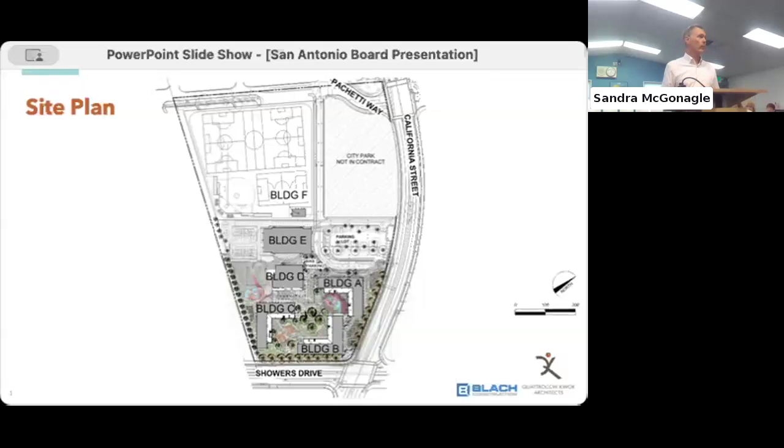Thanks, Nick. Zooming in a bit on the site plan, there's the parking lot, there's the gym. One of the things we're always trying to do with outdoor spaces on elementary school campuses is balance a bunch of different needs. We want spaces for outdoor learning, for student gathering, for quiet contemplative space, but also very active spaces for play structures and games, and do that in a way that's easily supervised.

So the way we've used these three L-shaped buildings is to create a few intersecting spaces that are a little more private, and then that connect out to the more public space. We also have the additional complexity of the joint use piece and all of these things coming together.

With the three buildings, A, B, and C, across the first floor we've spread the little kid classrooms—TK, kinder, first and second grade—as well as the admin and the library, and some support classrooms. So we have a TK kinder play area as one of those first courtyards, right near the admin, right near the entry. Parents often drop their kids off directly into that playground, so we want that to be easy to access, and easy to corral the children at that age. That's the most protected courtyard there.

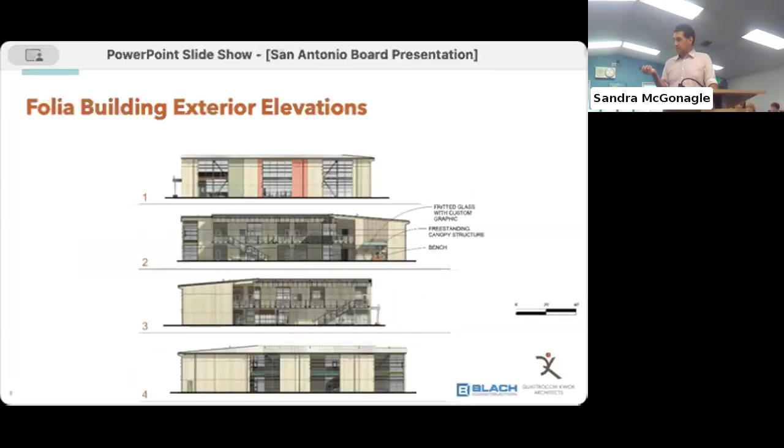And then here's a rendering, we'll show a few renderings. These are pretty schematic, as is the nature of where we're at, early on in the process, so there's still a little bit of a sketchy vibe to them. But just to give you an idea of what these spaces will start to feel like.

So this is looking at the side of building A. This is the main entry, with the parking lot beyond. This is an initial idea of what that canopy might look like. And then there's the main lobby, and we've added some extra glass on that side looking out, so there's really good supervision of that point of entry into the campus, and it's also a welcoming and inviting entry for parents.

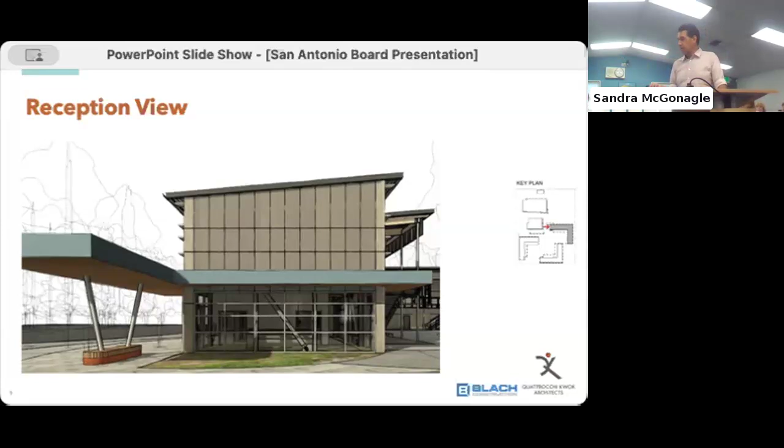There's another view looking down that avenue that leads out to the playground, back into that area. So you see a hint, just a suggestion there, of a playground. We haven't gotten to choosing playground equipment and things like that yet, but that would be where that TK kinder playground is. You can see the second floor walkway going around to the building, and then there's that main entry too. And then this is the covered outdoor eating area that extends off of the MPR.

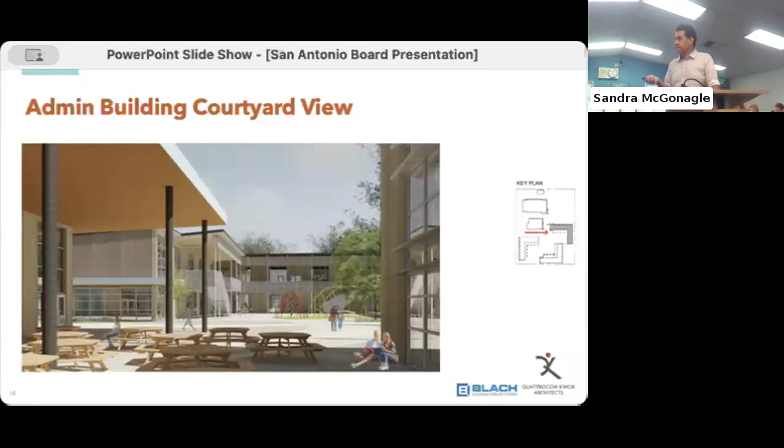On building B, making our way around the corner, on the first floor here are 2 kindergarten classrooms, still pretty close to where that playground is right here.

And then there's a flex space between that, which can be a great space for like an RSP or other special education support staff, or it could be configured for offices, any number of things as well. You see there's custodial and some storage space there as well, and then the restroom for the kindergarten classroom. And then the same thing over here, so we have a restroom here tucked behind the elevator.

And then we have our grade 1 classrooms, very similar to what we saw on the second floor of the other building, where there is a double classroom with an operable partition between it, and your storage and tech wall and displays within that.

And then we have one of those flex classrooms. You suggested this might be a good spot for like a makerspace kind of classroom. It's pretty centrally located on the campus, and it can be accessed by all the students because it's on the ground floor. But the exact uses and what we need in each of those spaces are one of the things that we'll dial in as we go forward.

Second floor of this building is another flex classroom here. And then here we have the grade 5 and 6 classrooms, and then another one of those unassigned flex classrooms here to give extra flexibility.

You'll see some of these are called breakout spaces, which are small conference room spaces connected to both classrooms, providing a spot to do pull-out instruction while still being supervised by the teachers in those classrooms.

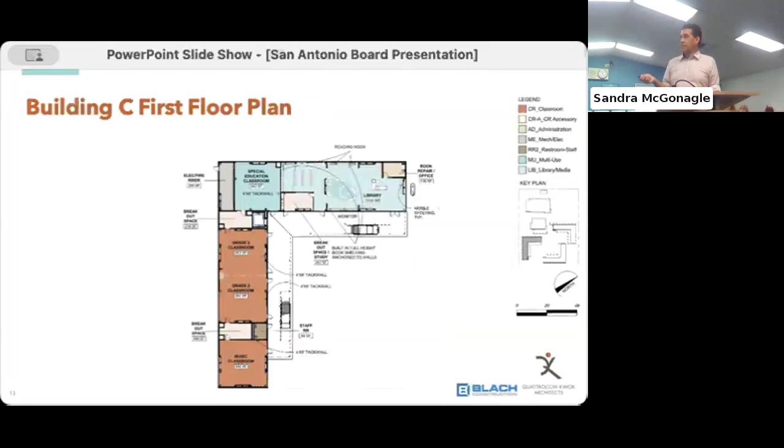If we're bringing a whole class or even two classes in to do a presentation, sometimes you may even want to use these two parts separately. This is an initial pass we'll dial in further. There's a little office book repair room, and a larger breakout space for larger groups—could be student groups meeting to work on a project, or a staff member working with a small group of students.

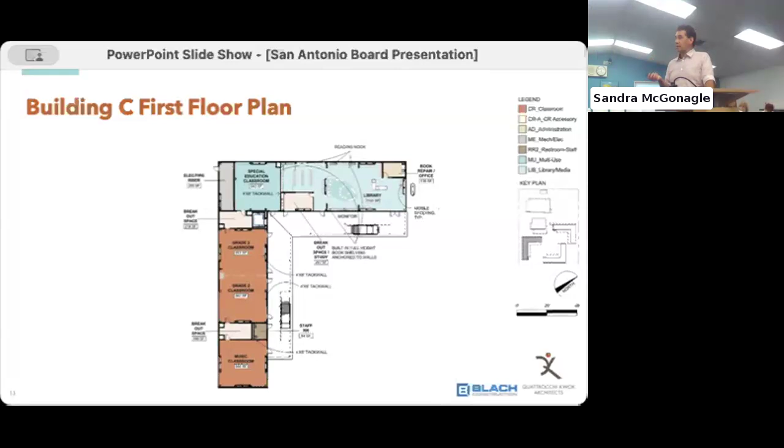Then we have the second grade classrooms, and another one of those flex classrooms—in this case we're suggesting maybe a music classroom on the end. Going up to the second floor of building C, we have the grade 7 and 8 classrooms, and here we're suggesting a science classroom as one of those flex classrooms to support especially the middle school grades, plus one more unassigned classroom below.

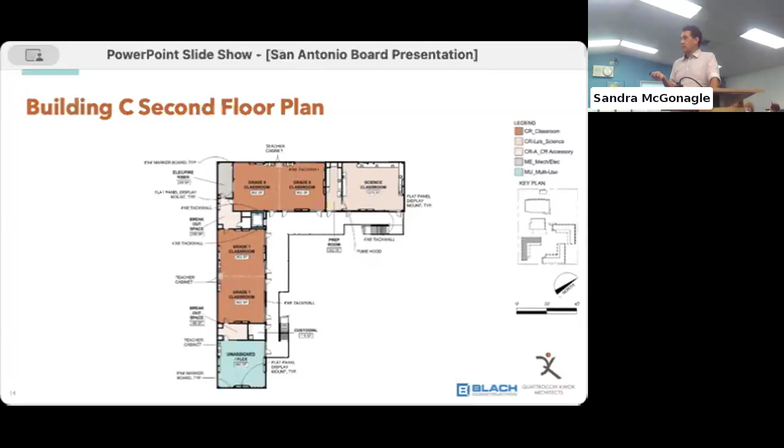Here's a quick courtyard view, looking back across to building A—this is between buildings B and C, you can see the arrow there. Looking across that courtyard, you can get a sense of the interconnected spaces, looking back towards the entry, the TK Kinder playground, and the balconies where the bigger kids are, overlooking those spaces as well.

Thanks. Forgot to mention, you guys can interrupt us anytime. Oh yeah, trying to get some. Yes, sir.

Is there a question about restrooms on the second floor—staff or students? I think we're still working through some of the restroom placement. There's been more discussion about it. There seem to be a lot of staff restrooms there. Yeah, I think we've had different discussions about where and how the student restrooms might want to be distributed.

That connects to something we've been discussing too—should we have bridges between all these buildings so you could move between the second floors of all of them or not? That obviously adds a little extra cost, which we'll talk about later, but it gives more flexibility as far as circulation and accessibility of the students to those restrooms.

So now I'm going to talk about the custom buildings—not Folia's, but the specific site-built buildings. This first building is built on the floor plan for the multi-use building. As Aaron mentioned, it's on the site right here, and this avenue here is the outdoor eating area, shown in the dashed line. In the renderings there's quite a nice overhang providing shaded outdoor area directly off the assembly room of the MPR, connected with double doors and even a couple roll-up doors, so it could really be an integrated indoor-outdoor space.

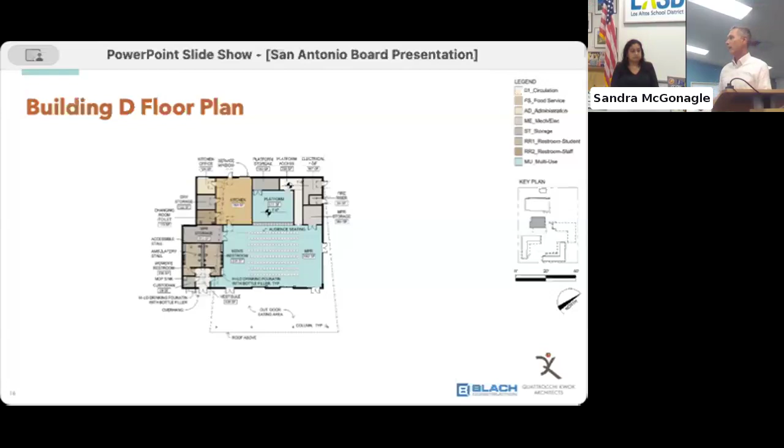Moving forward, these are the exterior elevations of the building. So the first thing I want to point out, and you can see it in the side elevations, this is all outdoor space. This vertical line here is a column capturing the long overhanging roof, and you see it again down here. So this is the outdoor eating area.

You can imagine tables here. And these 2 elevations, the north elevation and the south elevation, you can really see the shadow, hopefully illustrating the kind of shaded area that we would create for you.

Actually, this is the back of it, so these are the roll-up doors, and these are the 2 entry doors that would face where all the tables are. These are the doors into the restrooms that we talked about earlier. This is the back or the north face facing the gymnasium, so this will be the serving window for now and entry to the kitchen.

And then the same sort of materiality that Aaron talked about, using softer tones for the plaster and perhaps highlighting it with some colored metal panel or cement plaster. Again, trying to keep it somewhat neutral until we know more about what your goals are. Maybe you really want a bright, colorful campus, but we'll find out about that as we move forward. We want to provide opportunities for both highlights as well as nice neutral zones.

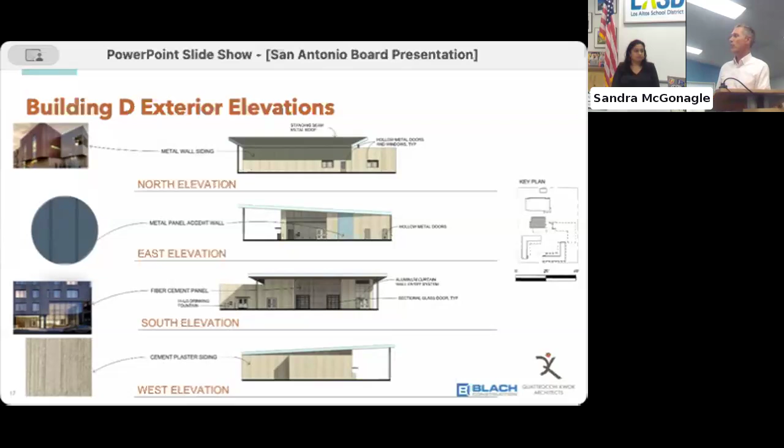This is a view looking kind of from the kindergarten area toward the dining area. This is the 7th and 8th grade building wing up here, and this is the library right here. And then we're looking over here - this is the outdoor eating area, the public entrance to the building right here, and 2 entrances into the multi-use from there with the roll doors, which are kind of hidden in the dark.

Oh, sorry. Is that your... that's fine. Sorry about that, folks. Okay.

Moving on to the gymnasium. This is something you've all seen before for the most part. What we've got here is the gym proper, designed for middle school right now, with the striping and the size of the striping and things of that nature.

We've got the primary lobby here at this lower corner off the parking lot, leading you to an office for the city recreation department, and then toilet rooms, a janitor's closet, a little bit of storage. Then we get into the entry to the gym with the bleachers along the bottom, nice direct access for visitors. There'll be some storage for the city up here, some building infrastructure right there.

Over here in this wing, the locker room wing, we also have storage for the school, so everybody has their own storage. Boys and girls locker room complete with locker room and toilet rooms, and access to the outside as well as access to the gyms. In addition to that is the field house. There will be restrooms designed as part of the field house, along with storage and maintenance.

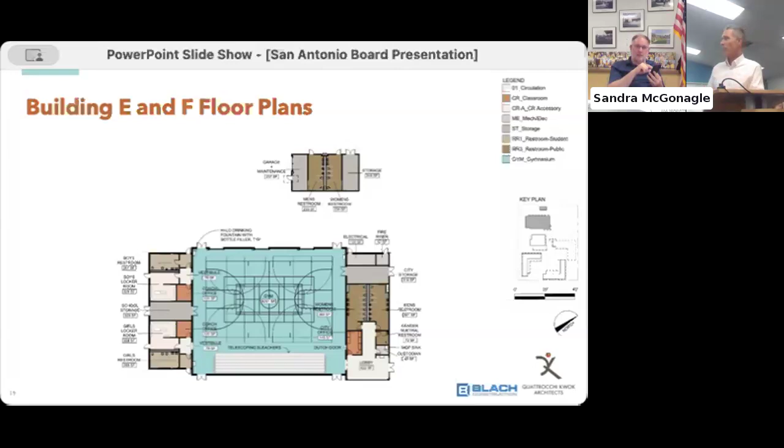Can I ask a question? Where did that field house come from? I don't remember a field house. That was part of the program from the beginning, for fields. We may not have talked about it in great detail, but it's been there from the beginning. So it's called a field house, it's a restroom building to serve the field. Let's clarify, field house makes it sound a little grander than. Right, I understand, I just don't remember it.

I have a follow-up question. This is an agenda item we haven't gotten to yet, but I wanted to review what was in the joint use agreement. What I see is that it will include athletic fields, including soccer and baseball field, and a few other optional add-ons, but I didn't see anything about a field house, so I didn't know if that was part of the joint use agreement. When we finalize a joint use agreement, we can talk with the city about whether they're gonna pay for that extra building or not, is it something we would have at our schools. We might not have a bathroom out in the field, we do have porta potties at all of our schools, but I know PE does like having storage out there. All of our schools have little shacks and sheds, little tough sheds out there for storage. But when we get into the final joint use agreement with the city on any additional costs, we would work with the city to see if they would want to partner and pay for some of that cost.

Do you know roughly how big the field house is? Good question: 1,100 square feet.

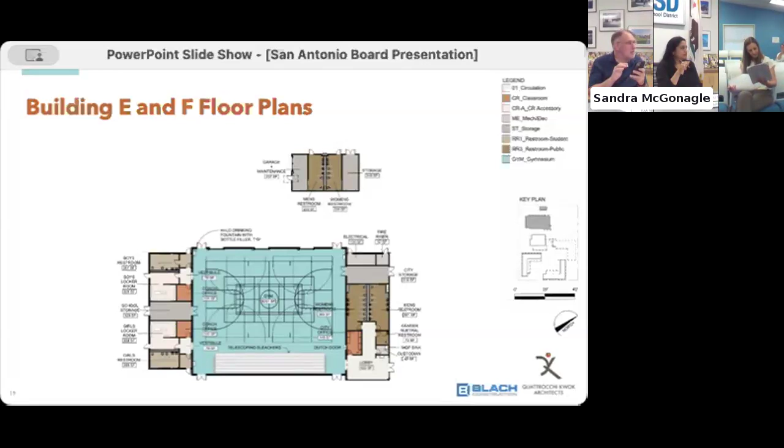Could I go back to slide 18 just for a second? On the right-hand side you have two buildings that are shaded, how do I interpret that? Just that you can see those buildings in this view. This seems to be reversed. It would be nice if this key plan was rotated so that it had your same vantage point, but essentially this drawing is if you are standing right here, looking this way.

As you look this way, you have the library on the left, and then you have buildings on the left. So this would be the library here, which is the end of this L-shaped building. And then this is the MPR outdoor eating area here, which is right through here, and of course the MPR. So as you're looking, the MPR is on your right, and the library and upper grade buildings on the left. Does that help at all?

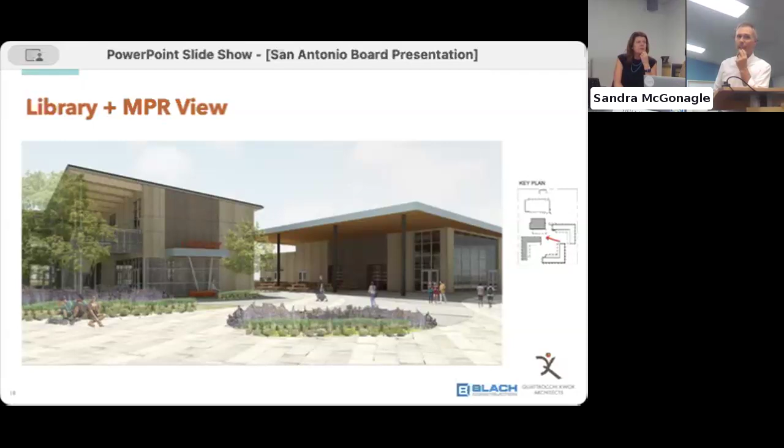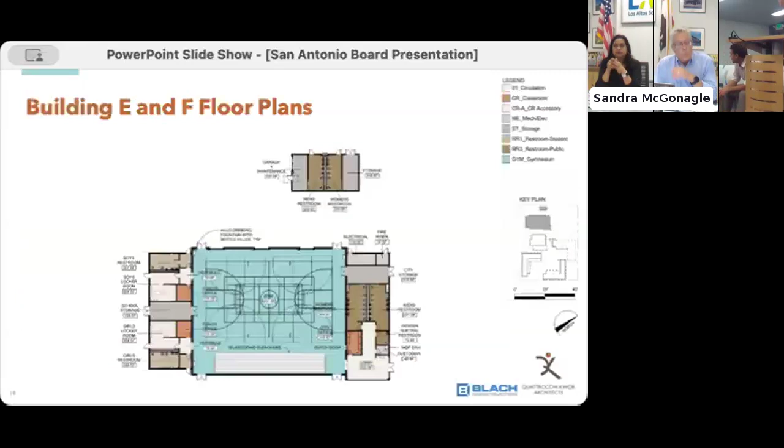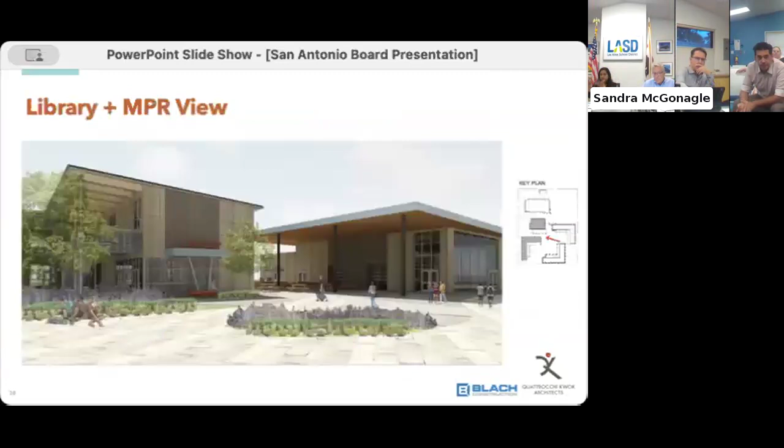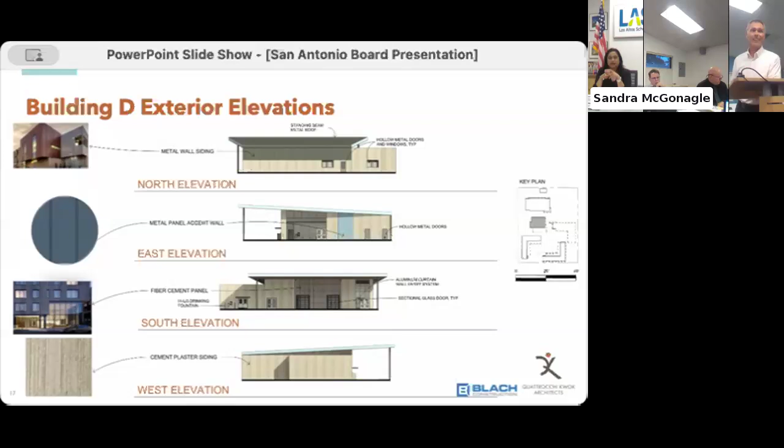It's all right, I have to look at it more carefully, but I understand. Do you know about how many kids can sit down to eat at one time? We haven't done a calculation for that yet, but we could easily do that for you. I'm just asking because it's kind of small, I don't know that it's gonna be enough for all of the students to sit. I think we stagger our lunches, but I just want to make sure it's big enough. That's a good point, we'll do that for sure. We also know that TK and K like to be closer to where their classrooms are at, so oftentimes during the normal core campus the upper grades like the sixth graders eat here and the TK eats here, it's a little bit at grade level. We'll start off by giving you the capacity for that. Excellent question.

We were discussing the gymnasium again, and I think we're ready to look at the elevations. These are similar to before, with the repeated architectural language, same concept of materials and colors, trying to capture shaded portions with an overhang on the buildings for nice daylighting, with appropriately placed glazing. The entry to the building is identified for visitors with a canopy, as well as perhaps some graphics, either for the gymnasium or something of that nature.

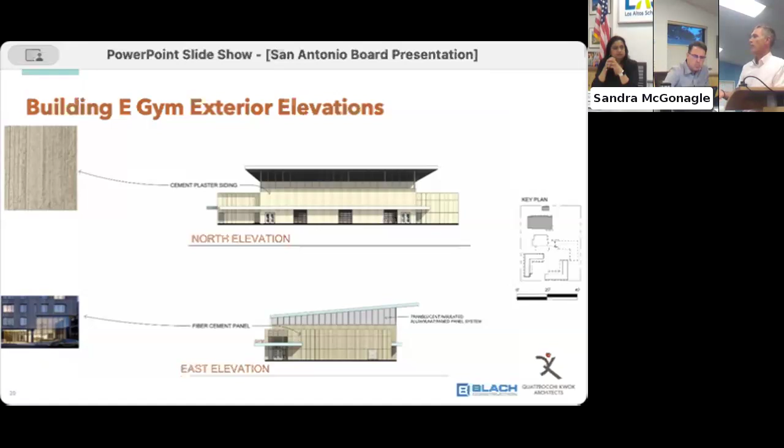This is looking at the next two elevations. This would be the locker room wing, looking at it from the blacktop. And then the south elevation would be the one that faces down to the water.

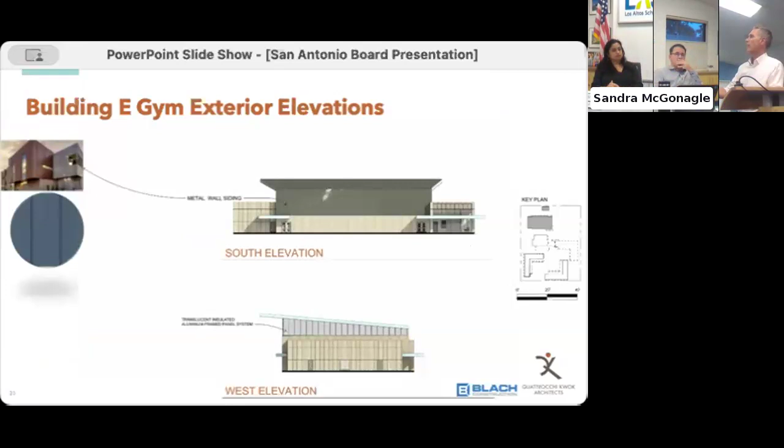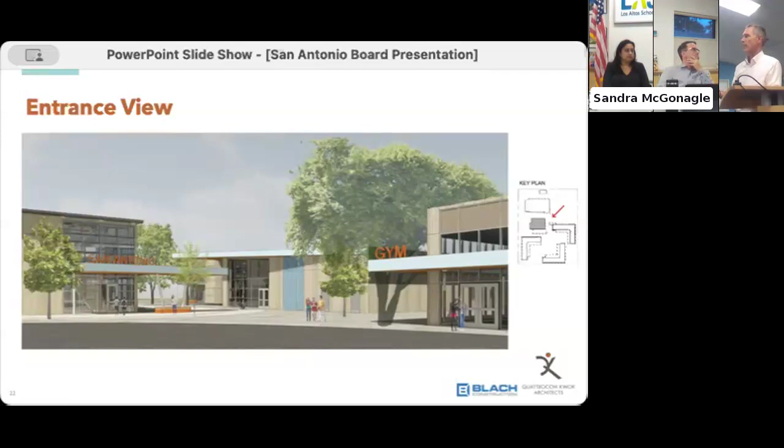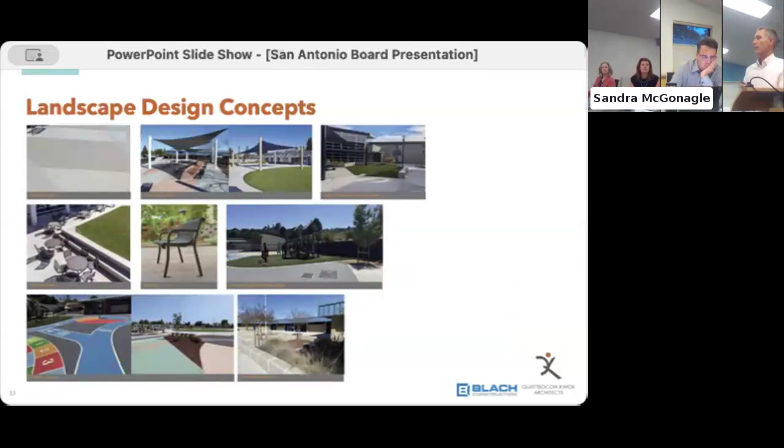The last thing I want to get into is that we're starting to have conversations about landscape concepts, types of landscaping, and types of furnishings for the exterior, as well as other outdoor amenities like bench seating and striping. We're starting to look at what the landscape could be, drawing from what we call inspirational images to start building that palette.

So at this point, I'm going to turn it over to Amber to talk about the budget.

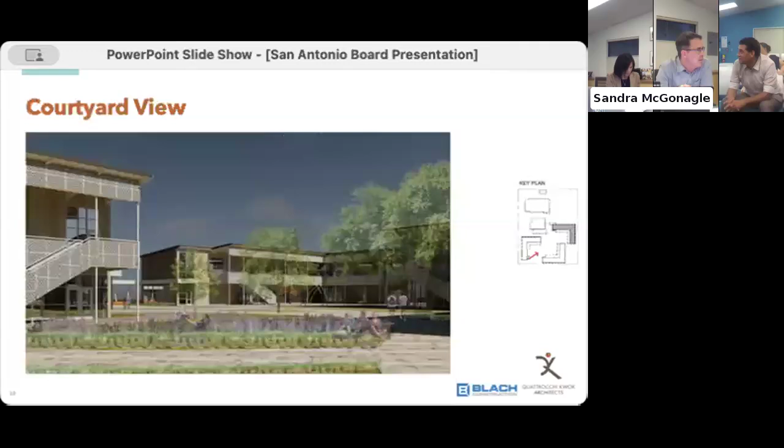Either one of these, the overall schematic - was an option looked at where building C on the lower left is kind of flipped to create a more unified internal courtyard space, or was that considered?

We looked at a lot of different options. No, I think what I'm getting at is Showers Drive is a very busy street and there's a tire repair place across the street, so I'm a little worried about noise and just the view into that big gap on Showers.

I was wondering if that was flipped over - I am somewhat compelled by the idea of semi-private interlocking spaces, but I feel like if we built it like this, we're going to need a 2-story concrete wall across that gap at the bottom left, which still may be preferable. I was wondering if there was a practical reason buildings B and C can't be close enough together to create a U, or if there was some other consideration.

It's an excellent question. I know that is one of the, I don't know, 27 variations. But I think part of it is it doesn't quite fit.

If you actually put them together, there's not quite enough room between the easement and the setback from the easement and the street, and getting the buildings to fit in there. So I think it was partly that, but partly also liking this concept of the interlocking courtyards and a little bit of separation from the playground. We also talked about there's a lot of noise that comes from there too, so having that more protected interior courtyard from the playgrounds seemed like a feature as well.

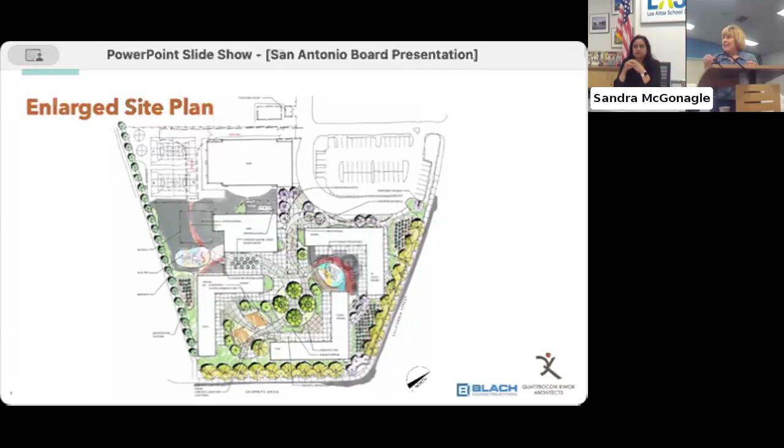Well, it's nice to be back. I haven't been here since before COVID, and I'm so glad to hear that it's Bullis Charter now. I read the Post, I read the Town Crier, and I didn't know that Egan was still being considered to move to that corner, so I'm so relieved this is the focus. My concern more is what Brian was touching on, in that it's such a busy corner, and I'm really concerned about security there. I was listening to your presentation to see if there's a wall around that corner, or it sounds like there's an elevation rise. But that was what I really cared to address, plus also to thank you for choosing to keep Egan where it is.

Thank you very much. I think just to clarify, we have not made a decision on what's going on there. I just want to be accurate. I haven't seen any decision made, but you're saying elementary children there - it's being built for a TK-8 program? Yes, it's being designed for that right now, not specifically for middle school. Correct, we're choosing something that gives us the most amount of flexibility over the long term.

Okay, board comments, Stella? I just wanted, as a point of clarification, there will be fencing that surrounds the campus, right? Fencing - we haven't gotten to laying that out yet, but our general approach is to use the buildings as a perimeter where we can, and then make sure we're securing and providing secure access onto the campus. So really connecting the buildings in this case, and then retaining the fields as well. Right, and so the access point would be through the lobby in the administration building. There's gates for emergency egress and for access outside of school hours, but during school hours you have to come through that main hall.

Thank you. And then I did have some comments since you were also looking for some feedback, right? Yeah, so when I looked at the budget, it did increase, and I'm sure some of it is just due to escalation, but I would also be interested in seeing if there's any fat that could be trimmed, do you know what I mean?

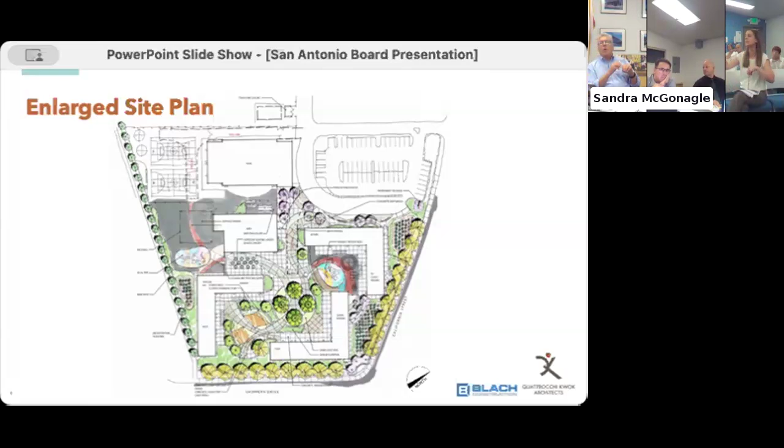They have their design and we have ours, so we're trying to get a meeting set up with them to coordinate their drawings and our stuff, and the timing of it, because we can't start our work until that driveway gets reconfigured. At the end, that driveway won't go through our property anymore—we need to figure out the coordination of when they reconfigure their parking lot so it's not showing the notch on our drawings. It'll be gone. I heard that had been taken care of, it's in process. Funny enough, this last summer Walmart did a lot of parking lot work out there anyway, so there were complaints from neighbors about them closing that parking lot down—there's been a lot of work in the adjacent lots as well.

You mentioned the word setback—what is the required setback for the Hetchy right of way, just out of curiosity? The Hetchy right of way is not on your property line, it goes right to the edge of the Hetchy. But we are doing the bike lane, right? Yes, which will be on your school property, but that will be a city bike lane, just to the left of those trees.

So that means the city maintains it? You said it's a city bike lane, but it's not our property. We're going to have to talk about that, because I think it kind of runs through the property line between us and Federal Realty, so there's going to have to be some sort of easement given up. That'll be all part of the property descriptions of how we lay things out, and also the layout area to the park as well.

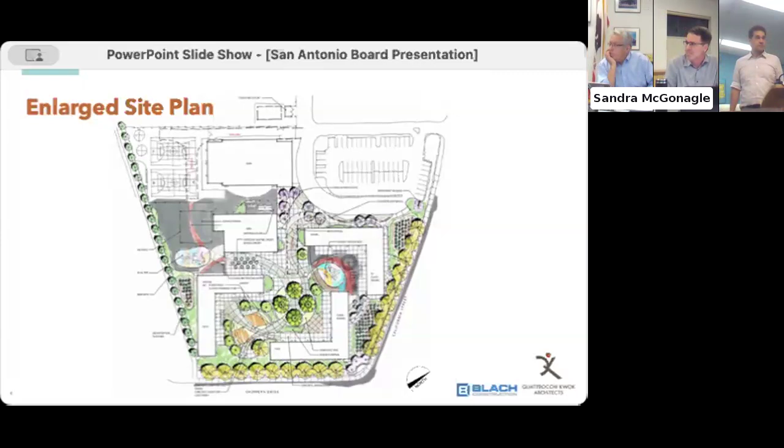Yeah, I think it's one of those things too, where if that's continuous negotiation, we can include it in the design and move that forward, so it's there if you want to build it, but it's always easy to not if it doesn't make sense. So you could bring the utilities to there. Yeah, absolutely, we could stub the utilities out and leave it at that, and then the city can build that in the future, whatever, that's a pretty minimal cost since we're running all these utilities right here anyway.

Any further comments, discussion? All right, thank you very much. Very very exciting. Welcome, exciting to see the project moving forward. Yes, that's exciting, we appreciate your time. Thank you. Thank you. Thank you.

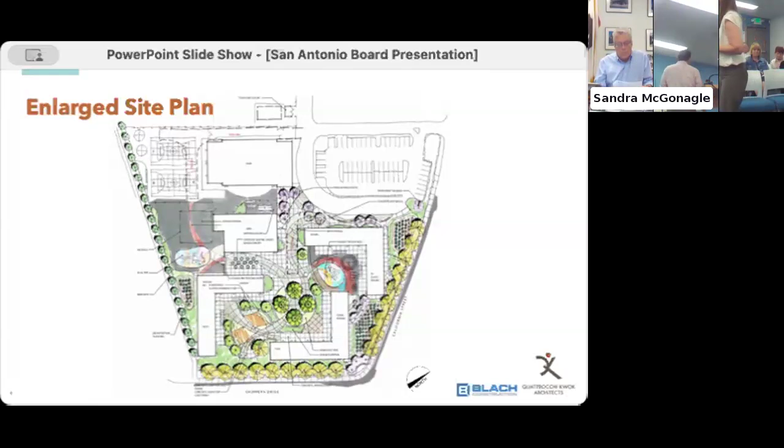Now, moving on to our next agenda item: the first amendment to the memorandum of understanding, transfer of development rights with the city of Mountain View. Mr. Walton.

We wanted to go back a little and talk about how these 2 items we'll be approving tonight came about. In 2019, the district purchased what was then called the Kohl's site, now called the San Antonio campus. In cooperation and partnership with the city of Mountain View, we had the funding joint use agreement, FJUA, and at the same time there was an amendment to the FJUA. One of the appendices you'll be approving tonight is the TDR program, which is a funding mechanism to help the district offset some of the construction costs.

Then our lovely friend COVID happened, and COVID caused a significant delay to implementing the San Antonio campus, building and constructing it. It also hampered the local commercial real estate market, which made the TDR program very slow. The district has received 1 TDR for Sobrato, and recently the Merlone Geier TDR has gone to the city - we're anticipating the city approving that TDR in December and executing it. Since last December, the district has been planning and hoping to get the field open by the fall of 24.